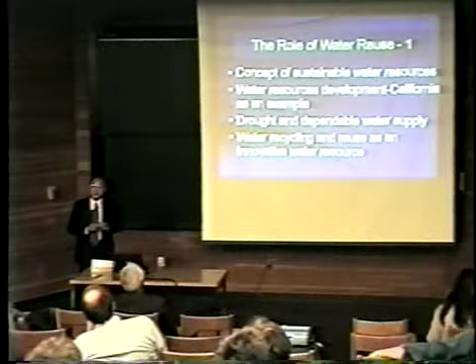So let me give you a brief idea about what water reuse is and why we are doing water reuse. First I'd like to discuss the concept of sustainable water resources. I think this is a very important theme all over the world. Then I would like to use California as an example of water resources development, particularly in our glorious days of the 1950s and 60s. Then I would like to discuss a little bit about drought and dependable water supply issues. And then I'd like to introduce water recycling and reuse as an innovative water resource.

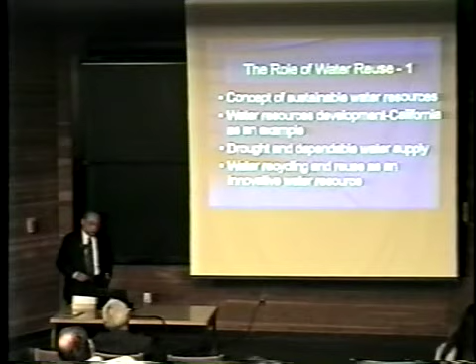Then I would like to identify 7 different categories of water reuse with examples. And then I'd like to discuss technical issues and process reliability. This is a very important issue. And then to touch base with how safe water reuse is, and then to speculate on future perspectives. And the theme, as I was introduced, is all living species in harmony for the next century.

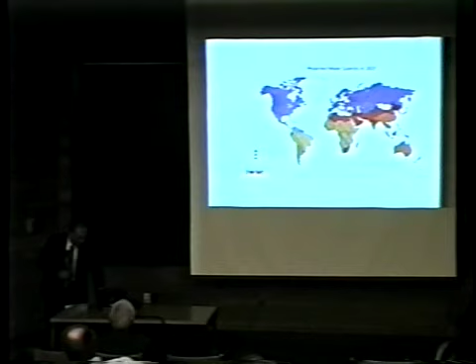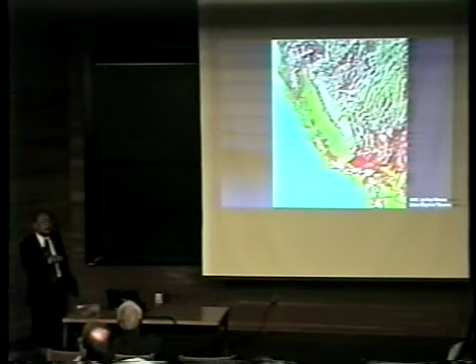Now, if we look at California, to review a little bit about California itself, we have mountains, the Siskiyous, our version of the Sierra Nevada mountains, and then the Central Valley, and San Francisco, Los Angeles, and San Diego. So this is the basic geography of California. And the idea, of course, is to bring water from the north and east to the cities of San Francisco, Los Angeles, and San Diego.

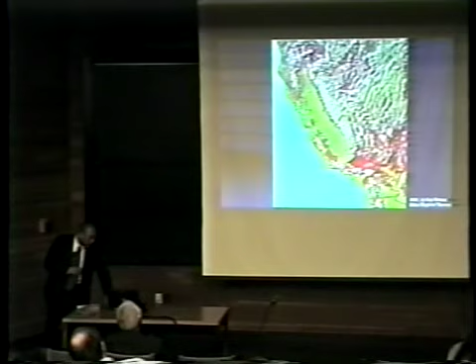And this is very significant because nowadays Spain, particularly Andalusia, is trying to bring in water from the Ebro River, very similar to the San Francisco Delta, into Andalusia. And they also try to import water from France, along with the TGV, so water would come to Barcelona, Catalonia. So this is a very big issue, and they really wanted to look at the California picture and what actually happened.

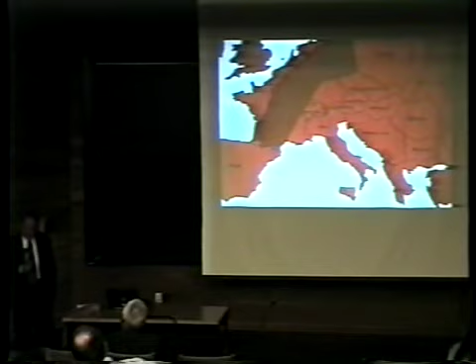So that is the reason I made this particular one. And as you know, we have enormous water delivery systems, plumbing, if you like. Water is moved from north to the south, east to the west, through two major aqueducts, the Central Valley Project and also the California Aqueduct.

Now, this is very significant, particularly when you talk to audiences in a developing country. Many new ideas, revolutions, are coming in California, such as the water bank, water rights transfer, and others. To actually physically move water, you need pipelines or reservoirs, and also aqueducts. Many of the countries discussing these new ideas, like water banking, water transfer, water rights transfer, may not have this kind of plumbing system.

And this is one area I think California did a wonderful job in the 1950s and 1960s, up to, let's say, 1978 or so. So this is a background of California before we get into this innovative thinking about water banking, water transfer, and so forth. We do have this physical system.

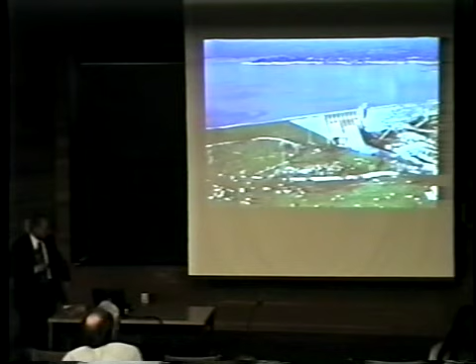Now, obviously, our best water comes from snowmelt, and this is one of those mountains, and also Shasta Dam in the north. Then the water goes through the aqueducts. And California is one of the most productive agricultural lands, as you know. Some 200 commercial crops, 1/4 of the nation's table foods, 1/2 of fruits and vegetables. So enormous agricultural production, and water is very, very important for commercial reasons.

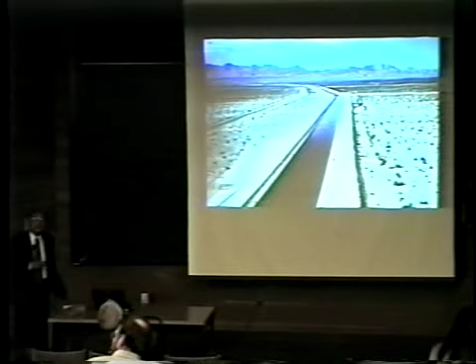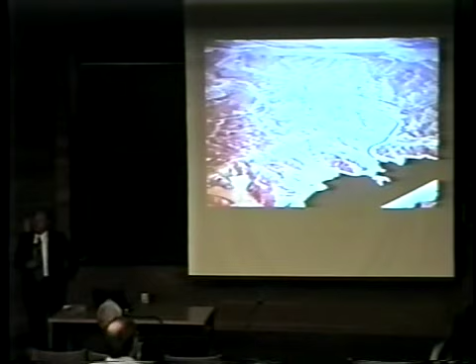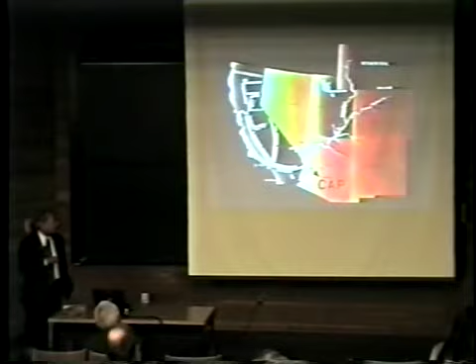Now water can be transported all the way to the desert, as you can see. So we have enormous infrastructure in civil engineering, water resources development, and management. Now let's look at the water picture in a summary. Let's put ourselves in Los Angeles. As I implied, the water is coming all the way from the north through the Sacramento River Delta to Los Angeles. This is the California Aqueduct.

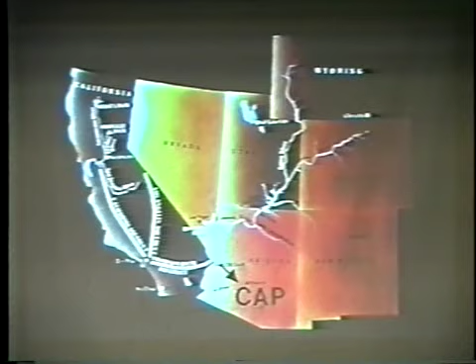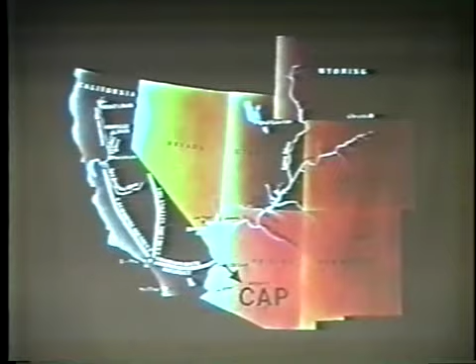And of course, Los Angeles has the Los Angeles Aqueduct south of Yosemite National Park. Then this is basically our interstate, international water, the Colorado River system. So 3 different surface water lines are coming to Los Angeles. Plus the local precipitation, that's number 4. And one more is the local groundwater. So 5 sources of water. If you look at San Francisco, we don't have that reliability. So you can imagine how well Los Angeles is prepared for drought or some disaster.

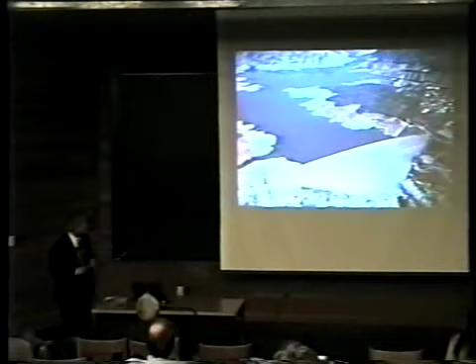In addition to that, I'm going to discuss water reclamation and reuse. This is the number 6 water resource. So 6 different water sources are converging on the Los Angeles area. This is another remarkable water planning, one of the remarkable aspects of California. But despite all of this, undoubtedly we'll face drought. This picture is from 1976. And obviously the city of San Francisco and the Bay Area have enormous population growth, and all of the cities want dependable, reliable water, even in drought years.

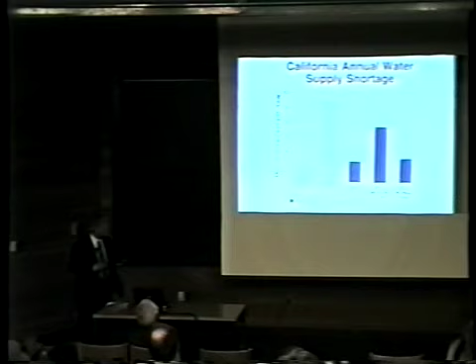So if you look at the Department of Water Resources publications and try to figure out what they are trying to do in the future, this is year 2020. Basically 2 scenarios: one is the normal precipitation year, the other a drought year. I mentioned the drought in 1976-77. They had somewhere like a 10.2 million acre feet water shortage that year. In the normal year 2020 scenario, somewhere like 2.4 to 2.5 million acre feet of water will be short. In a drought year, somewhere like 7 million acre feet. This is the Department of Water Resources projection.

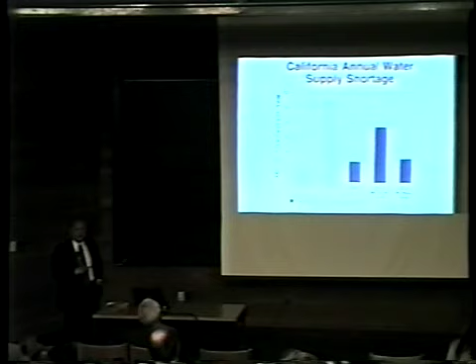They have no really responsible solution to that. So this is an irony of the water department, saying that we have a shortage because of population growth, but we don't have a really tangible solution to it. So let's remember 3 million acre feet in the normal year, and 7 million acre feet in a drought year. And I tried to match it by reading through the report to see how they are doing it.

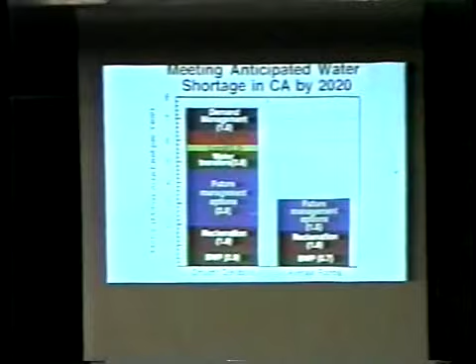Remember that in the normal average rainfall year, that was about 3 million acre feet. They are projecting some sort of options in the future, 1.5 million acre feet, from the State Water Project or the Bay Delta project, CalFed, whatever it is. But they are projecting about 1 million acre feet of reclaimed water. So roughly 1/3 of future water supply they are projecting to come from reclaimed municipal wastewater. Now if it happens to be a drought year, the picture is more drastic.

Remember that drought year they had something like a 7.5 million acre feet shortage. Some sort of demand management, groundwater overdraft. This is the kind of solution, temporary. They may overdraft the groundwater. And this is the one area they're talking about in CalFed to come up with some sort of options, 2.8 million acre feet, maybe new reservoirs, offstream, and so forth.

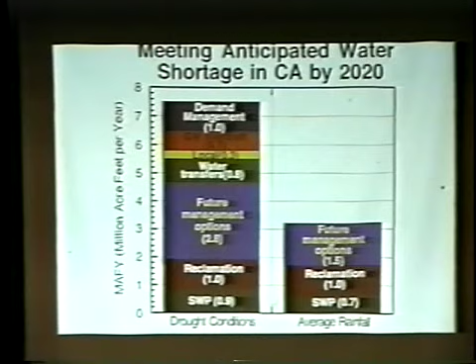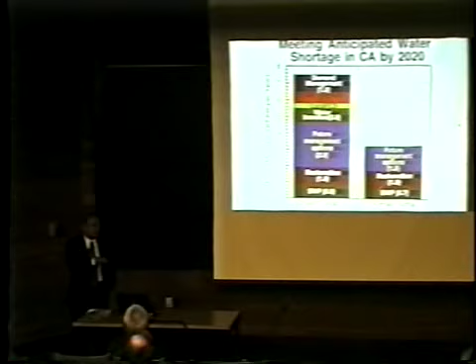But reclamation reuse is still there. And I think it is becoming very important. Even our water development agencies, such as the Department of Water Resources, are realizing this water reuse could be a very, very important, reliable source of water.

So with that introduction, for the next maybe 20 minutes, I would like to discuss water reuse. This is a subject I have actually studied for the last 15, 20 years. And I would just like to give you quite a simplistic overview of this issue.

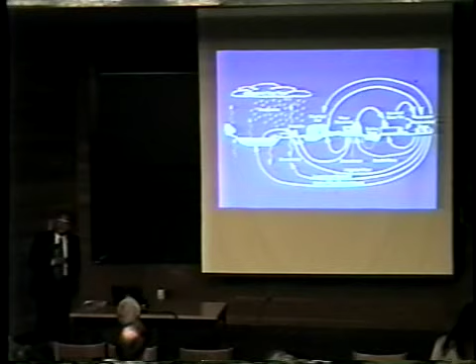Now I think this is very fashionable, and I think it's correct, thinking about water as cyclic in the system. It could be a global circulation, but if you look at the municipalities and cities, there is a kind of recycling happening. This particular drawing came from one of the water agencies in Japan, and I thought it was very nicely done. This is the global scale of circulation: precipitation, evaporation, precipitation, and so forth. But what we try to do in water recycling and reuse is to look at the much smaller scale of a municipality.

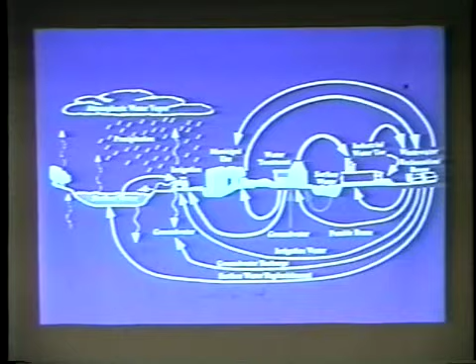You take water for drinking water purposes, then a sewage treatment plant, maybe you're discharging to the environment, where you're recovering that for beneficial use: industrial reuse, potable reuse, maybe irrigation, groundwater recharge, and so forth. So how small this cycle could be while remaining safe and reliable, this is the subject we have to study. But we have a fairly good idea which one is the best choice. This is the concept I think we'll be looking at in the future: this is not discharging or disposing of wastewater, but wastewater can be a resource in the water recycling context.

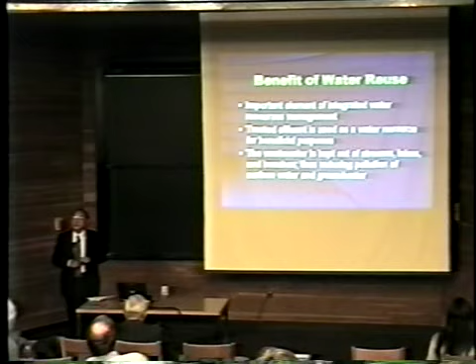So to look at the benefits of water reuse, I think water reuse is an important element of integrated water resource management. Treated effluent is used as a water resource for beneficial purposes. And also, wastewater is kept out of streams, lakes, and beaches, thus reducing pollution of surface water and groundwater. This is also a very important effect of water reuse.

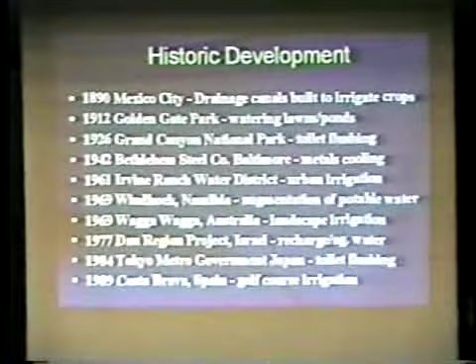Now, if you look at the historic aspect of water reuse, this is really nothing new. For example, in 1890, Mexico City started to use drainage water to irrigate crops. But unfortunately, this was not treated effluent, so the public health consequences were rather grave and significant. In our own state, in 1912, Golden Gate Park in San Francisco was watering lawns and the ponds. And in 1926, Grand Canyon National Park, being water short, used it for toilet flushing in the motels and hotels there.

Large industrial reuse happened in 1942 at Bethlehem Steel in Baltimore. This is rather important reuse. As a matter of fact, all the steel mill water comes from a sewage treatment plant in Baltimore, and even now they're operating it. A very important water resource right there.

But in a real sense, modern water reuse happened in the 1960s. The first large-scale one is the Irvine Ranch Water District in Southern California, a planned community, irrigating lawns and golf courses, schoolyards, and playgrounds. Then in another country, in 1969, Windhoek, Namibia: augmentation of potable water. This is one of those classic implementations of indirect or direct potable reuse. The demarcation is not that clear because of the kind of operation they do.

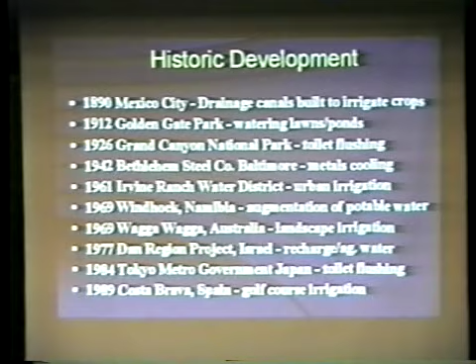On another continent, in 1969, Wagga Wagga in Australia started landscape irrigation. In 1977, the Dan Region project, a groundwater recharge project just outside of Tel Aviv, Israel. That water is transported all the way to the Negev desert for food crop irrigation. And I'm going to discuss a little bit the 1984 Tokyo government toilet flushing installations.

I do quite a bit of work in the Mediterranean countries, and one example I'd like to give is 1989 in Costa Brava, north of Barcelona, Spain: golf course irrigation with tertiary treated effluent. So modern water reuse started in the 1960s and spread to almost all places, including the Middle East, Saudi Arabia, the Arab Emirates, Kuwait, and so forth.

So with that in mind, I'd like to identify 7 different categories of water reuse: agricultural irrigation, landscape irrigation, industrial reuse, groundwater recharge, recreational and environmental, non-potable urban reuses, and finally, possible potable reuse.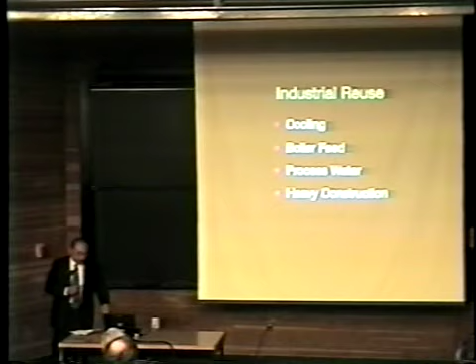The next category is industrial reuse. It can be cooling water, boiler feed, process water, and heavy construction like dust control. I'd like to concentrate on cooling water because this is a significant use of water in any kind of industry. One of the difficulties of industrial water processing is the variety of processes, which makes it very difficult to control.

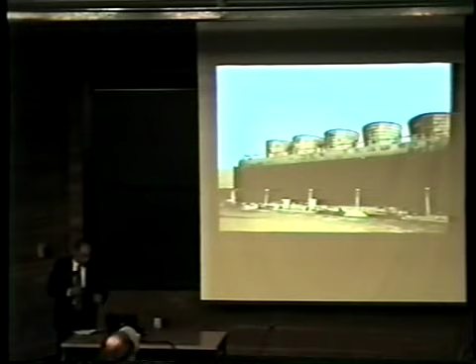But the cooling tower, this happens to be in the Burbank area, Burbank Water and Power, is a basically separated unit process. So you can get in and have the same kind of water quality anywhere - refineries, city, power generation. This is a very good application, and usually it could be secondary effluent well disinfected, or tertiary effluent, which is more common.

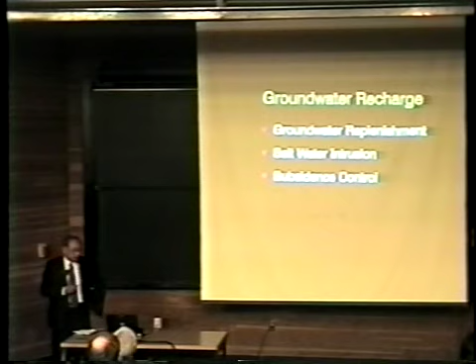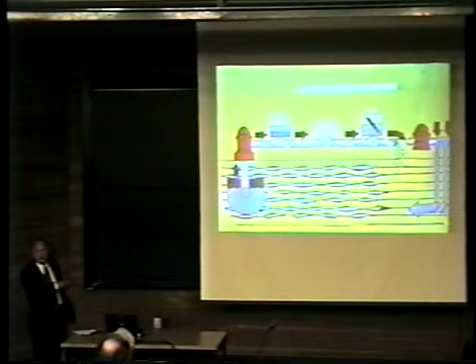Now, the next topic is groundwater recharge. This could be groundwater replenishment, saltwater intrusion barrier, and subsidence control. The concept of groundwater recharge is fairly simple: you have water treatment, cities, and wastewater, maybe advanced waste treatment, and treated effluent is put into the ground by way of surface spreading or maybe direct injection to aquifers.

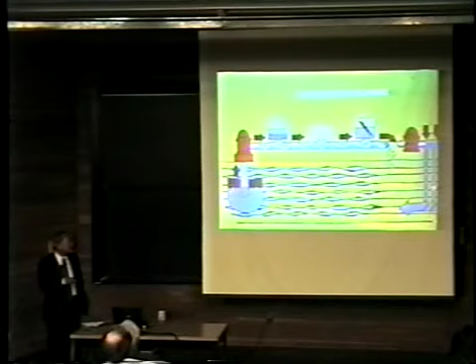Then water stays in the groundwater for a couple of months to years, then is brought up by pumping. So up to this point, it's probably still sewer water, if newspaper people would get into that. But for us it would be reclaimed water. Going through the vadose zone, unsaturated zone, or well-treated, this becomes groundwater.

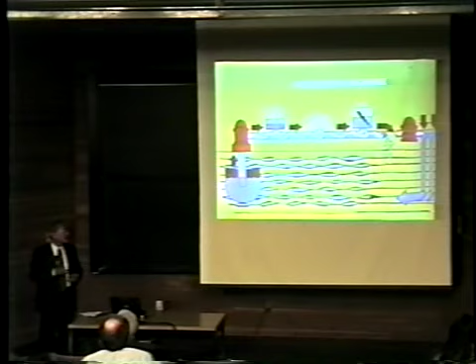So I think the psychological transformation of sewer water to groundwater is very important, because it stays in the ground for, say, many years. The public health implication is also very significant, because all of the pathogens and some toxic chemicals may be retained and decayed through the ground system, both unsaturated and saturated zones. So groundwater recharge is a very important concept, fairly simplistic, but the issues are very complex.

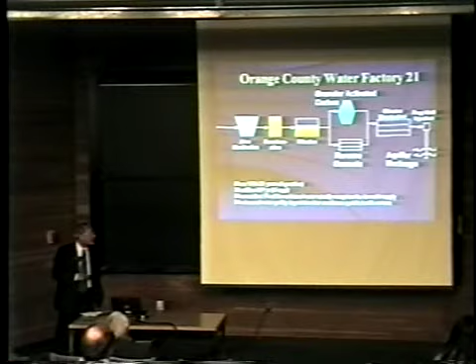So I took this, the classic sanitary engineering unit processes. This is operated at Orange County Water Factory 21, Orange County Water District. This has been running since 1976, almost 21 years of operation, 21 million cubic meters, 15 million gallons per day, and no more than 5% of reclaimed water actually comprises the domestic supply.

So this is the way they are treating it, and I'll tell you a little bit about more recent developments. The classic environmental engineering, sanitary engineering unit process: lime clarification, decarbonation, filtration, split into activated carbon treatment and also reverse osmosis, then chlorine disinfection and deep well injection. Now the most recent scheme would more likely be secondary treated effluent going through microfiltration and reverse osmosis membrane systems. This is going to become standard in the next couple of years, particularly with respect to groundwater recharge.

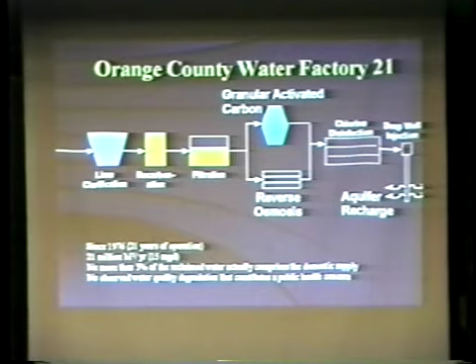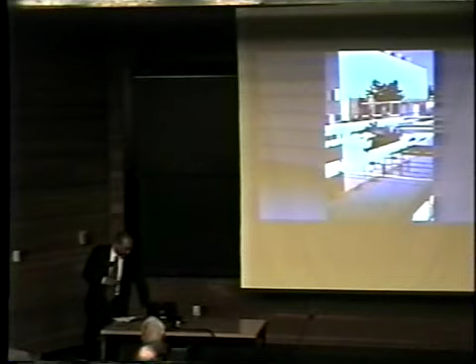Now this is right after the lime clarification, again at Orange County Water Factory 21. Sewage water looks like this already, very clean, sparkling looking. And that goes through the reverse osmosis membrane, typically looking like this. Then it's directly injected into 4 different aquifers.

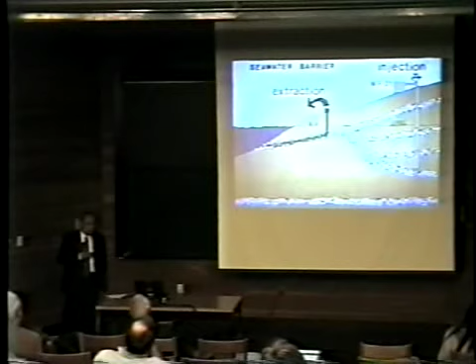Now this scheme though is a little bit misleading in a sense. We want to call it a seawater intrusion barrier. Now this is a very good way to get the permit to do it, but the reality is about 80% of the water is going inland because somebody is pumping it inland. So about 20% goes this way to stop the intrusion, and 80% goes inland somewhere. Okay, so that is the scheme.

And it seems we are going to talk about public perception. No doubt, I think we will have a discussion on this. But if you say this is a seawater intrusion barrier project, meaning simply stopping seawater from coming in and contaminating the freshwater aquifer, the permit would be issued much easier than saying this is indirect potable reuse, because you're drinking this water somewhere. So this is one discussion I'd like to have with you after this presentation.

The next one is another recent development: recreational and environmental uses, lakes and ponds, marsh enhancement - wetland is a very big issue.

Stream flow augmentation, fisheries - very often in Asian countries they're using reclaimed water for fish hatcheries, for example. Snow making too - not the yellow snow, white snow. Don't eat that yellow snow.

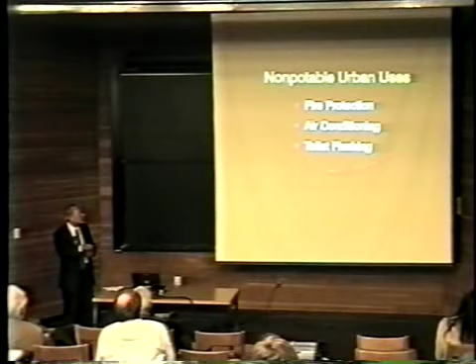Next is non-potable urban uses: fire protection, air conditioning, toilet flushing. I'd like to deal with toilet flushing in metropolitan areas. This example is in Orange County, and this is a new building with dual plumbing - two plumbing systems in it.

I was lucky enough to get in there when they were building it. One, of course, is a drinking water pipe, and the purple pipe is the reclaimed water. This is fairly standardized now, originated in California but used all over the United States - purple line is reclaimed water. In addition, in the earlier days of experiment and demonstration, they also used purple tape.

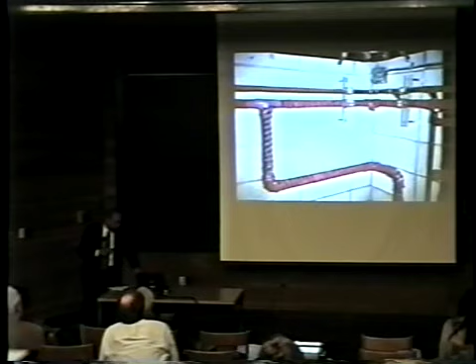This would be behind the wall, so a plumber can get in there and just by touching it know exactly what pipe they're dealing with. This was done very carefully to prevent cross connection - accidentally connecting the two lines. This is a major issue for this type of application.

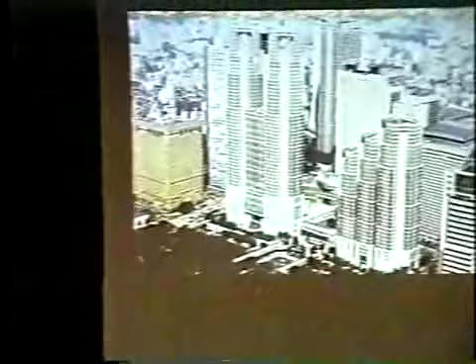All commercial buildings have dual plumbing for toilet flushing. It is an expensive enterprise, but there's no way to bring in water with big pipelines digging up all the places. This has been going on for almost 15 years now.

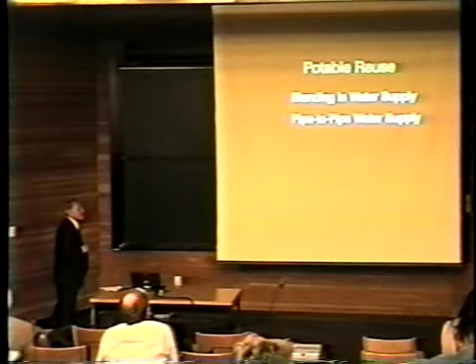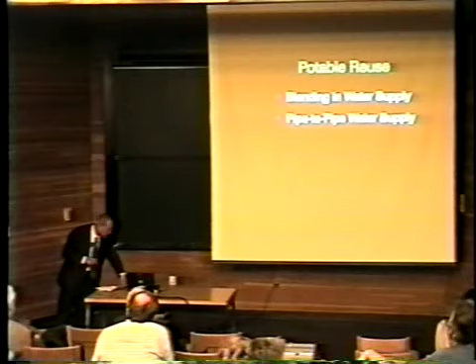Next, undoubtedly when you get into this kind of picture, we have to discuss how safe water reuse is, and we have to get into the argument of acceptable health risk debate. Should it be absolute risk, or relative risk compared to something? Should it be zero risk, or should there be some acceptable risk for this kind of operation?

That relates to microbiological risk assessment, particularly in the developed world - Europe, Germany. I happen to be working with a European Union program on this now - the enteric virus issue, particularly with respect to treatment, regulatory oversight, monitoring issues, enforcement and others. Another issue becoming very important in recent years, particularly with respect to indirect potable reuse such as groundwater recharge, is chemical exposure risk assessment. So those are the issues I think we have to face in the future.

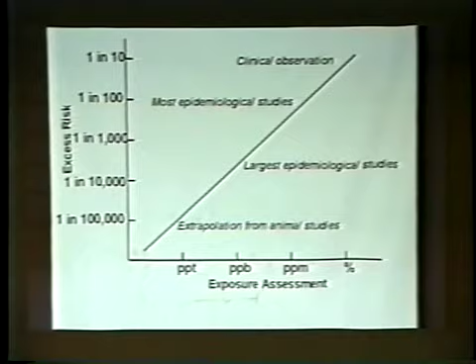And this is the concern we have. What science can tell us is still in this area of percent or parts per million. This is a dilemma we get into when we talk about water reuse in a very intimate way, such as indirect potable reuse. So we have to deal with arguments like: you have some dreadful sewage molecule somewhere, one molecule in one grape or something like that — is that safe?

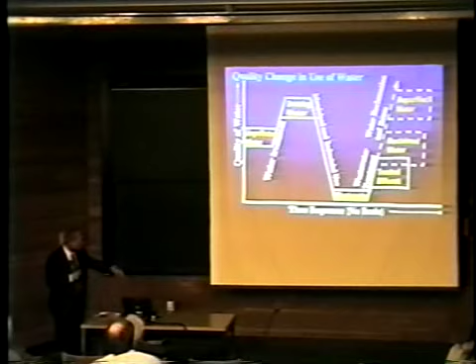So what I'd like to discuss, just about time now, is to look at this across an entire spectrum. Take some water quality parameters — this could be anything, pH, suspended solids, BOD, some toxic chemicals, nitrates — and presumably you have an unpolluted source of water, pristine water. But that's not good enough, so we elevate water quality through treatment, and we reach a water quality meeting EPA's standards or California drinking water standards.

Then after that, obviously, we generate wastewater or sewage, so water quality goes back down. In order to discharge or dispose of this wastewater, we had to do treatment — this is what we started in the 1960s and 70s when I was here: wastewater treatment, safely discharging to the environment, receiving waters, estuaries, or ocean disposal.

But since treatment requirements are much higher than they used to be — primary treatment, secondary treatment — if you put a little more money into that, it could become reclaimed water. That's the turning point, I think: once you no longer call it disposed or discharged water but reclaimed water, water resources, you generate economic value from it. This is part of water resources, an element of water resource management. I think this transformation is very important.

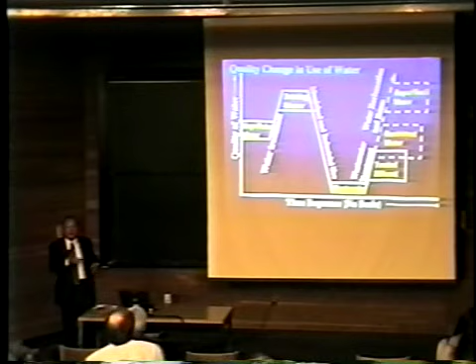Now the argument is, should you drink this water or not? This is a discussion. So here's one example I'd like to give you outside of California: the El Paso, Texas groundwater recharge project, running for the last 25 years, using activated carbon treatment, reverse osmosis, ozonation, and groundwater recharge.

And by nature, water use is very much interdisciplinary, not only science alone, but economics, political science, sociology, all of that. I think it is an enormous challenge if you go beyond irrigation of crops, landscape, and maybe wetland and so forth. But once you go into this area of the water resources, in a sense closer to drinking water issues, then also you can argue what is different here in unplanned incidental water reuse, such as in the Mississippi or Ohio River or any other polluted rivers and streams.

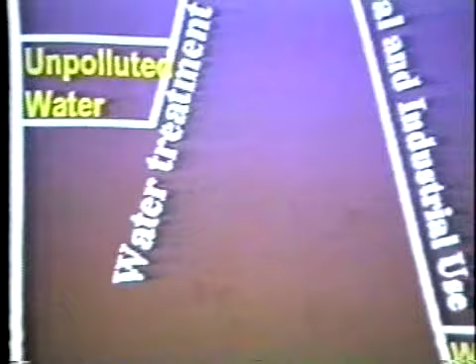I think we, as scientists and engineers, can talk about how no pristine, pure water exists on Earth. But at least perception-wise, let me say, we have somewhere pristine water. We hope that is maybe snowmelt. I think it was a slide maybe immediately before this that showed risk versus... Let's go back, yes. Yes, definitely.

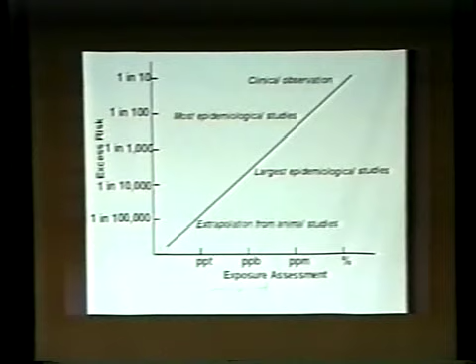Okay. Now, I get a bit lost in that because I didn't know, for one thing, are the PPT through percent, are those exposures as a percentage of recycled water, or are they contaminants within the recycled water? No, this was a National Academy of Sciences study, and I happened to be part of this study. This is managing wastewater in coastal urban areas.

That was a report. And what they meant, in a very simplistic way, is when you talk about the concentration of something, chemical A, we are talking about percent or parts per million. And the risk is a risk of something. Yeah, and when we talk about clinical observations, we're simply talking about what you can detect, like 1 out of 10 elevated cases, or 1 out of 100. That is all they meant. There's no really direct correlation, just trying to illustrate the accuracy or roughness of the argument.

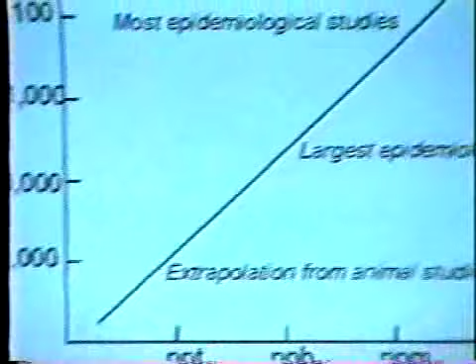Where does recycled water fit in this whole thing directly? Well, in the case of Los Angeles, the County Sanitation Districts of Los Angeles County have been doing groundwater recharge at the Whittier Narrows groundwater recharge site. They have done 2 different epidemiological studies, and they could not find any correlation with any kind of elevated cases, cancer, rectal cancer, and so forth. Yeah, right. So I think we are really talking about this kind of accuracy, but our concern is all here, like newspaper articles, we are concerned.

Could you, anybody? Yes? Well, most of the examples you gave generally are fairly large scale, the example of Tokyo or lots of ones that I'm familiar with. You also hear a lot about much smaller scale gray water recycling at the home level, and then this idea of a neighborhood treatment plant. Are we talking about two different philosophies of reclamation, or do you see them integrated together? I'd like your opinion on those small scale individual units, neighborhood units, versus the large scale.

What I would like to say about that is basically what I presented to you is water reuse at the scale of a publicly owned wastewater treatment, that means a municipal system. Now, if you get into individual house gray water recycling, I think it's a different story. You don't have any monitoring requirement like what we have. You may be doing it for your vegetable garden and so forth. I do not know well enough to say anything about the individual ones, but I do know some systems like in Arizona.